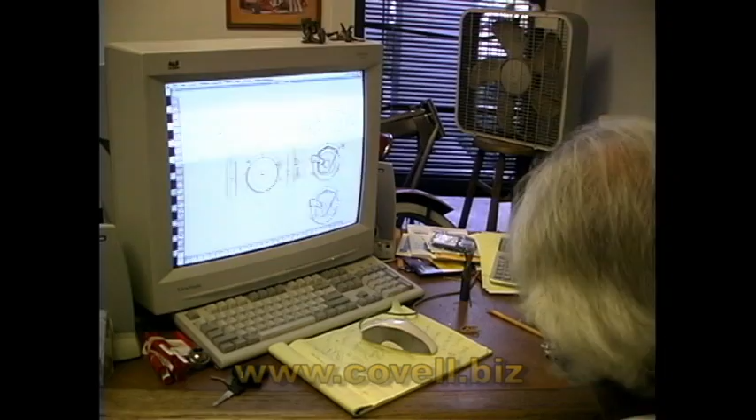For about 15 years I've been using a pretty simple software. It's a Mac-based unit, and it draws like you learn to draw in high school. It'll give you a front view, a side view, and a top view, but you have to draw them all in. It kind of restricts what you can do on your machine because you can only really profile parts. It's like cutting out cookies. You can put a window in it, a pocket, or maybe a beveled edge, but everything is flat. All the faces are flat, the sides are square, because you're cutting around it like you might have cut on a Bridgeport. That's getting kind of old.

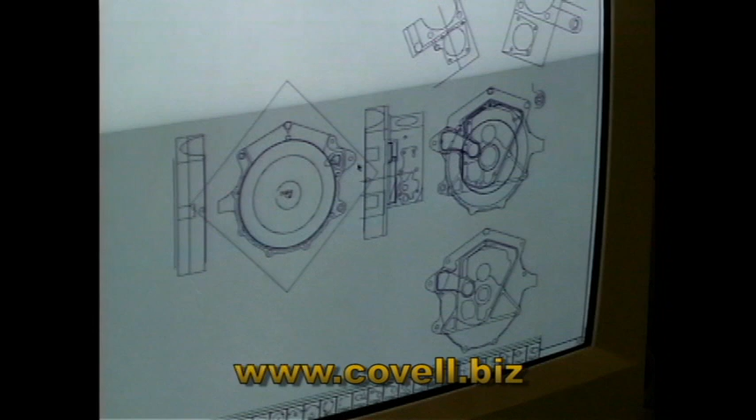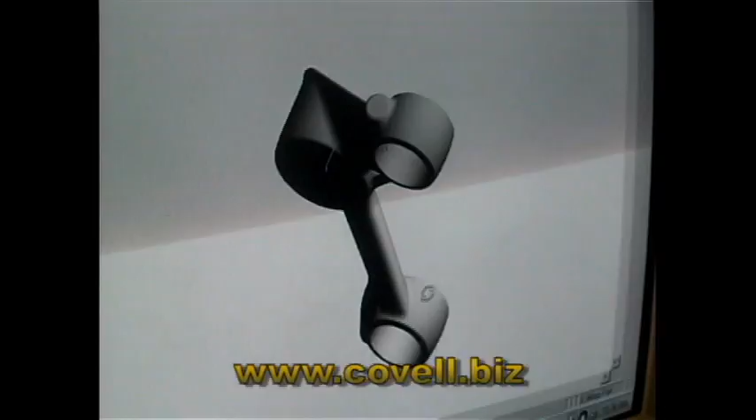Recently I changed over to a PC-based software where I can get into making things that have more than just three planes - a top, a side, and a pocket in it. I can start doing things that have shape. This is a triple clamp I'm making, a bottom triple clamp for a little Triumph motorcycle I'm building, and I'm really excited about doing it because now I can do things that have shape, that don't look like a brick or a 2x4 with a round edge on it. Now I can get into doing all kinds of different shapes.

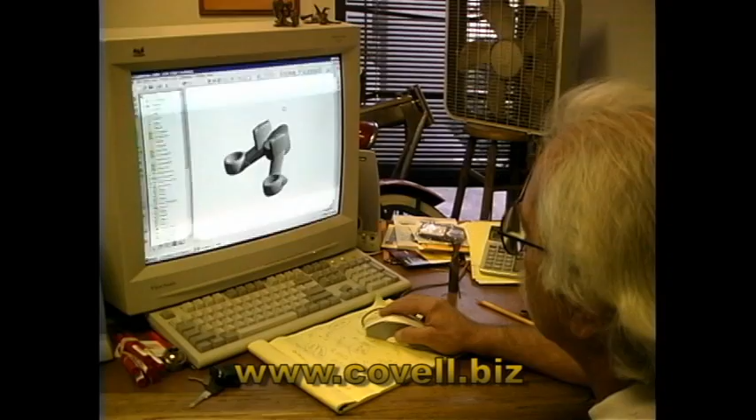This would be the top one, and because of it, the motorcycles are going to look better.

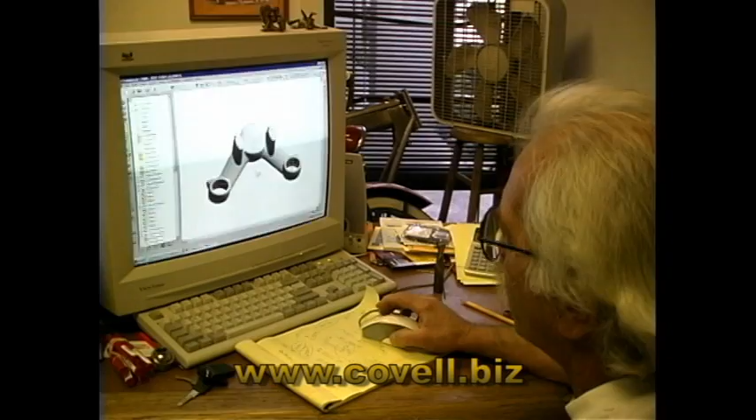I'm going to enjoy doing it because, to be honest with you, I'm getting burned out making billet parts on a CNC machine in 2 dimensions. We've seen every shape - they've been copied by everyone. Somebody will put a little different edge on it or something, but still, everybody's parts look the same. It's a lot easier to just pick up a phone and call somebody and have them send you something, but what you're getting is their idea of what looks good and what doesn't, and it might not be your idea. It sure as hell most of the time ain't my idea.

So I make my own stuff, and it's a lot of fun, and I'm very happy when I'm done, because it's my part, my style, the way I want it to look - not the way someone thinks I want it to look, not the way someone thinks they want it to look. It's a lot more rewarding for me to do it that way.

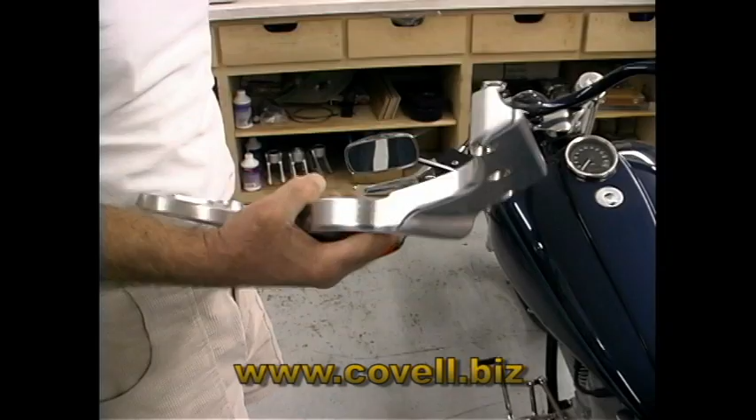I'm thinking about building a new motorcycle, and because billet is cool and you gotta have billet, I'm gonna make some aluminum parts for the frame. This will be the new rear upright that will bolt to the top and bottom frame rail and carry the swing arm. The frame on the new bike will be kind of a semi-monocoque, I guess you could call it, where it will have some aluminum pieces in it, some steel pieces either riveted or bolted in. I mean, it's what I do.

I make parts, and I'm usually pretty proud of what I make, and I'm tired of doing the same thing. So now we're going to start with bikes with shape.

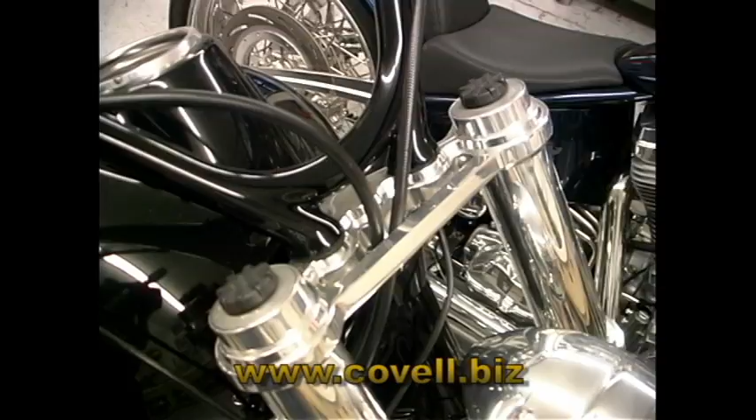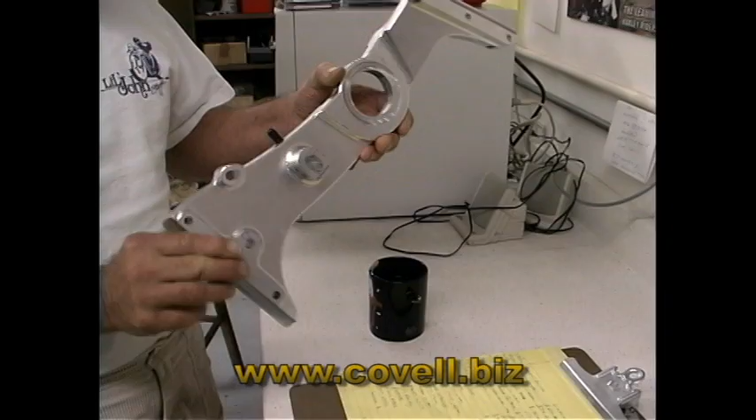This is a set of triple clamps I made a while back, and you can see the difference between these clamps and those clamps that I used to think were just the coolest thing in the world. Well, those look like something that got made in a 6th grade machine shop class, and these look like something the government paid money for, in my opinion. So I'm looking forward to being able to do those kind of parts with shape, parts with style, rather than those cookie cutter parts with a beveled edge and a pocket in them someplace, which seems to be what's on the market today.

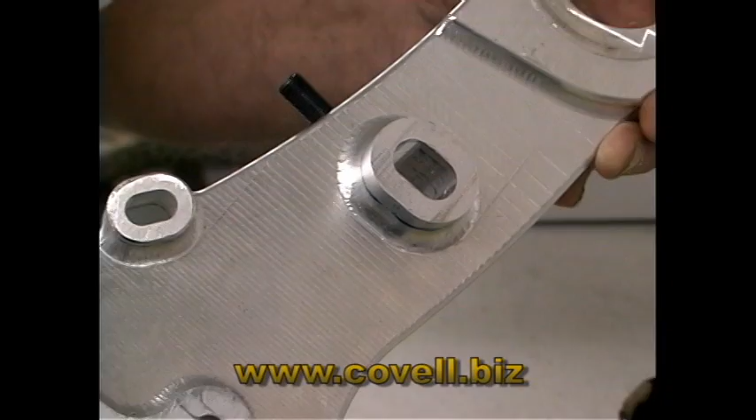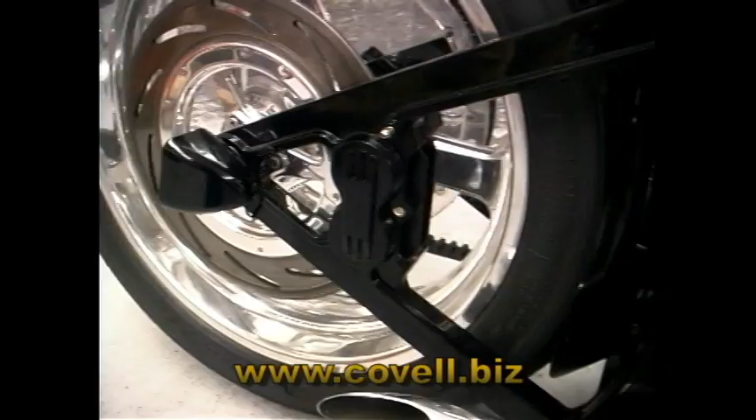Actually, the first motorcycle part I built was for a friend of mine who wanted an aluminum swing arm for his Softail, so I made him one similar to the ones I'm making and selling today. After I was done with it, I thought it'd really be cool to build a brake caliper into the swing arm. Well, if you do that, then you no longer can adjust your belt.

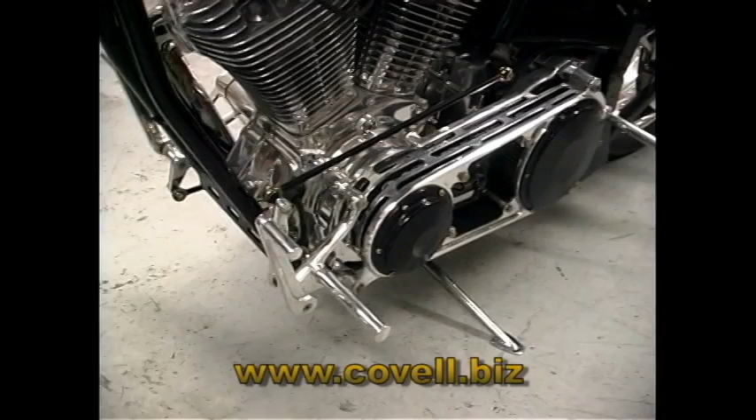You can't be moving your axle back and forth because this doesn't move. So I thought, okay, if a guy really wanted to do that, the only way you could adjust the belt would be to move the motor back and forth. I couldn't figure out how to adapt that to a stock Harley frame, so the reason I built the very first bike was to see if I could build a swing arm with a brake caliper in it and move the motor back and forth to adjust the belt. The first motorcycle was just mainly to see if I could put a caliper in a swing arm.

So I figured out the swing arm, I figured out the frame, I figured out sliding the motor back and forth, and then one thing led to another, and I started building every part to make the motorcycle. The problem was everything was only common to this motorcycle. Most of the parts, 90% of the parts, wouldn't fit on a stock motorcycle.

So I changed over a little bit and I started building components, because a lot more people wanted to buy components than wanted to buy $50,000 motorcycles. So I adapted what I learned from these bikes into a small parts line. Some of the parts on here are really kind of nice and very unique, but they would only work on this motorcycle. So things like my primary, my forward controls, the swing arm, I started making those that would fit on a regular Harley Davidson.

There's a handmade motorcycle there, and here's a customized Harley Davidson. It's a toss-up which one a person would like better. Personally, I like this one because it's a much easier bike to put together.

I just went to the dealer and got a Softail Standard, the cheapest bike Harley makes, and brought it home, and 6 weeks later, this is what I had. It was much simpler. You got more instant gratification. I didn't have to work a year on it. And in my opinion, it's every bit as nice as my handmade bike over there. Actually, I like it better.

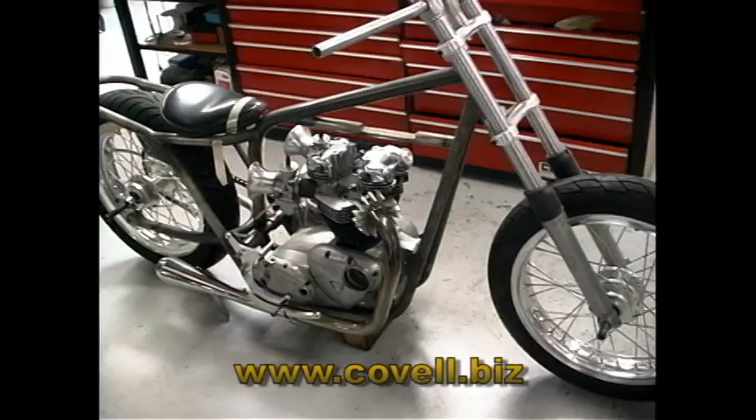This is my Triumph. I've been working on it for 3 years, or I started it better than 3 years ago.

Triumphs were my first motorcycles, and I went to a bike show and there was a good looking Triumph there, and I got all excited and I needed to have a Triumph. So I bought a bunch of stuff, and like a lot of other people, when you get it home and put it together, it looks like a bad hero sandwich. There's stuff hanging out of the edges and nothing fits.

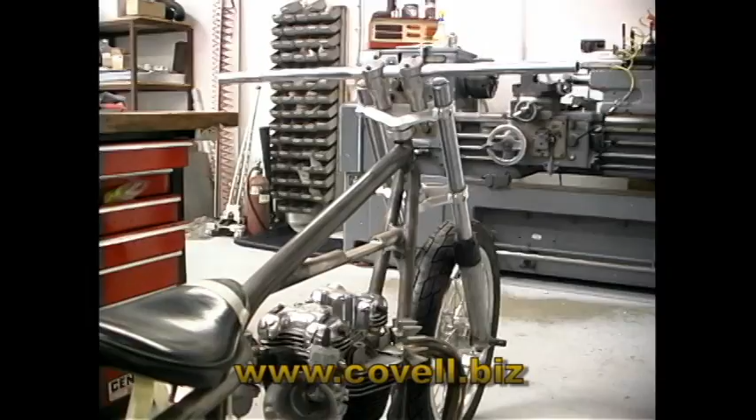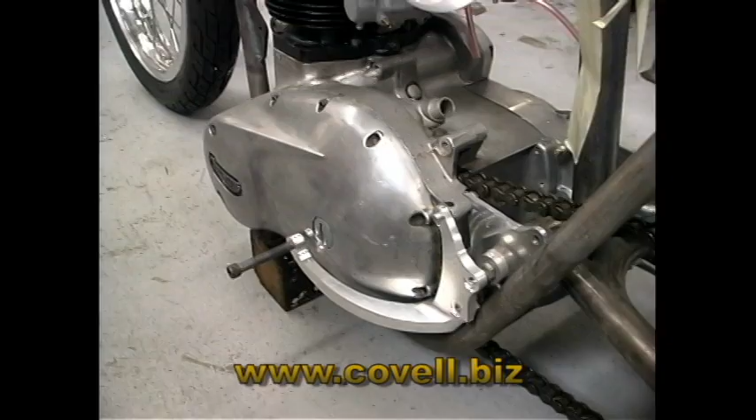So finally I put it aside, and I realized that the only way I was going to get one that I liked would be to build my own. So I started building a Triumph along the lines of an old Trackmaster dirt track bike. As a matter of fact, I even bought a couple of old Trackmaster frames, but when I put those together, they looked like exactly what they were. They were half-mile race bikes.

They had a lot of ground clearance. They had very little fork angle in them. They were built out of lightweight tubing, and I didn't figure they'd last on the street. Plus, it wasn't what I wanted it to look like.

I had to learn how to build plugs to make molds off of. I tried hanging stock fenders on it, and I didn't like the way they looked, and I tried putting stock tanks on them, and I didn't like the way they looked. The tanks that looked the best were the little racer tanks, but they only hold less than a gallon of gas, so you weren't going to get anywhere on that.

So I got to a point where, okay, now it's time to make tanks and fenders. So I made plugs for the fenders, which is something I'd never done before, and it was something that I was able to learn. I can use that in the future. Now I know how to make a plug.

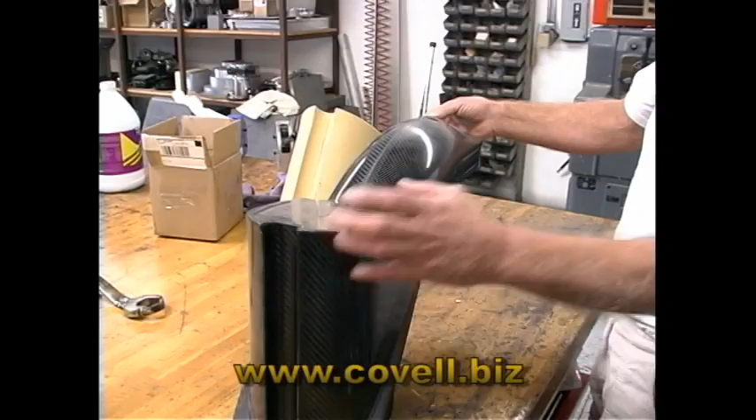This is the plug. This is the male that we use to make the mold to make this carbon fiber fender with an oil tank built right into it.

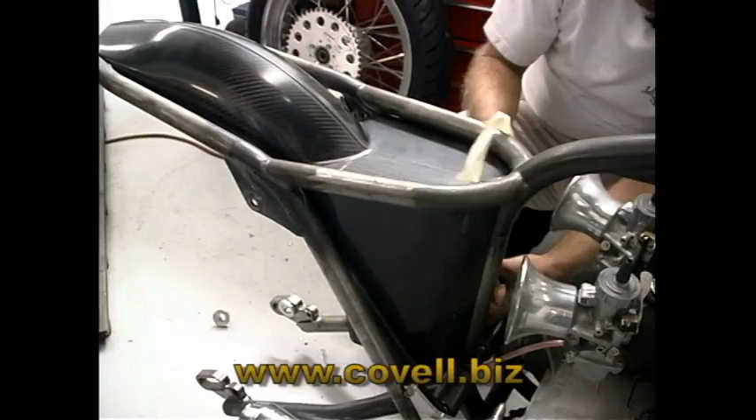It's wonderful the way that fits. I made that plug on my NC machine by going off of the same kind of drawings that I used when I did the frame layout.

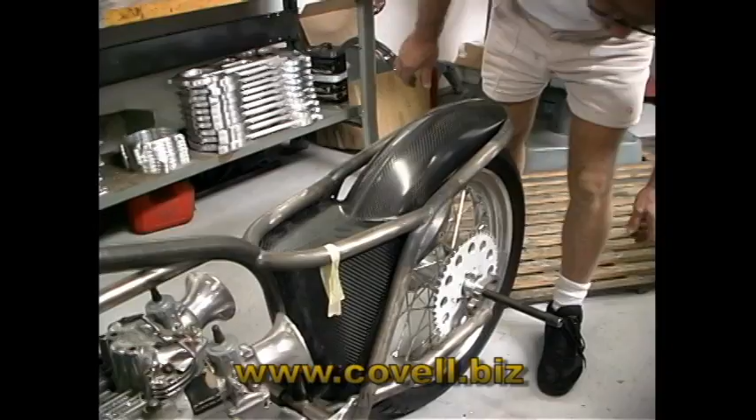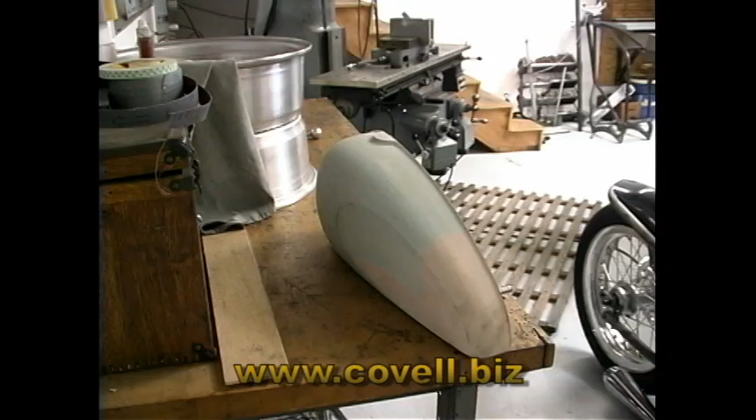I wanted to make a gas tank for it, but one of the things I liked about the Triumph was the style, it's symmetrical, and I always did like the shape of the gas tanks with the little dent for the knee in there. So I carved a plug. The coil is sitting here, the ignition is sitting here.